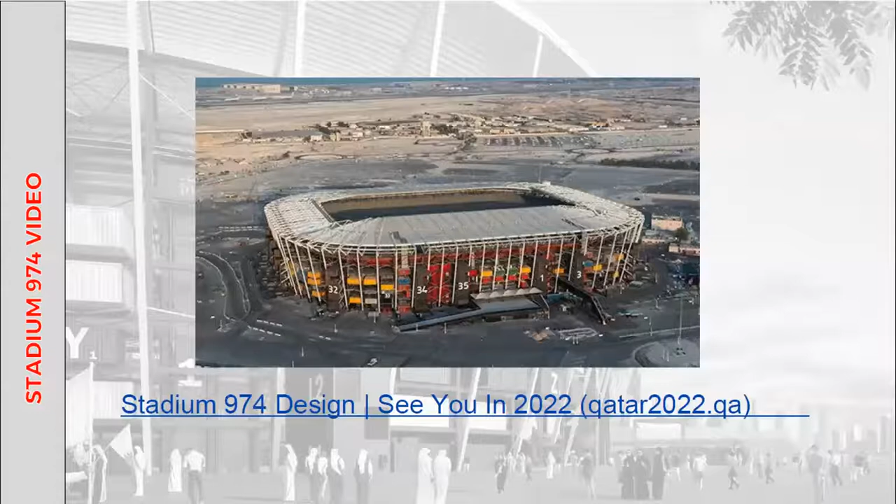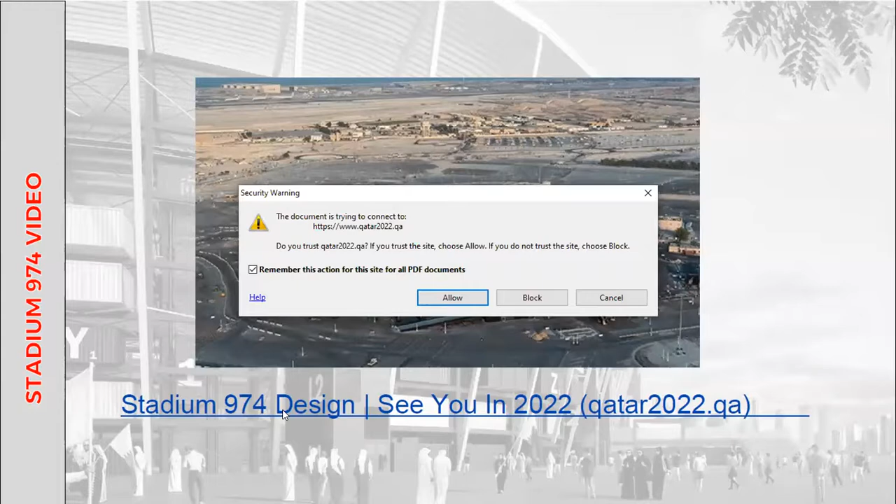And if you just want to click on that link, I just wanted to show everyone the promotional video for the stadium. It's just a YouTube video. This is basically how the Supreme Committee, which is our client here... You just scroll down this page, Dr. Dara, and there's a YouTube video. This one? Just here. Just play that.

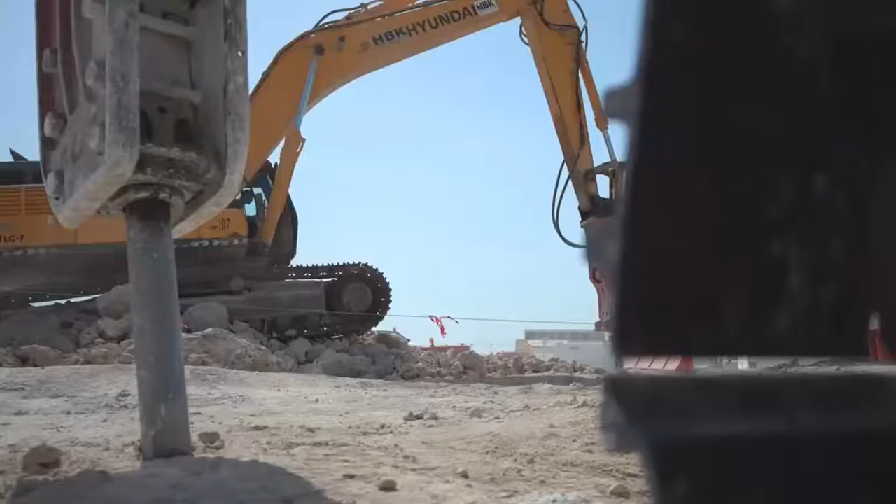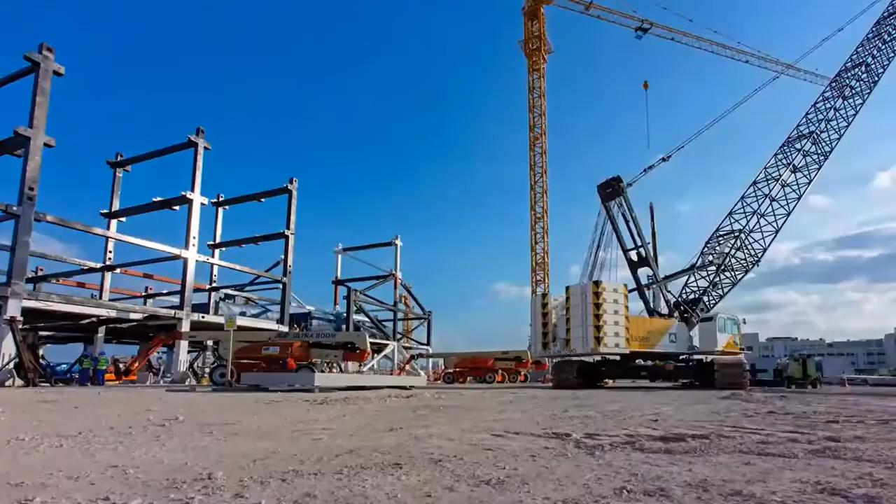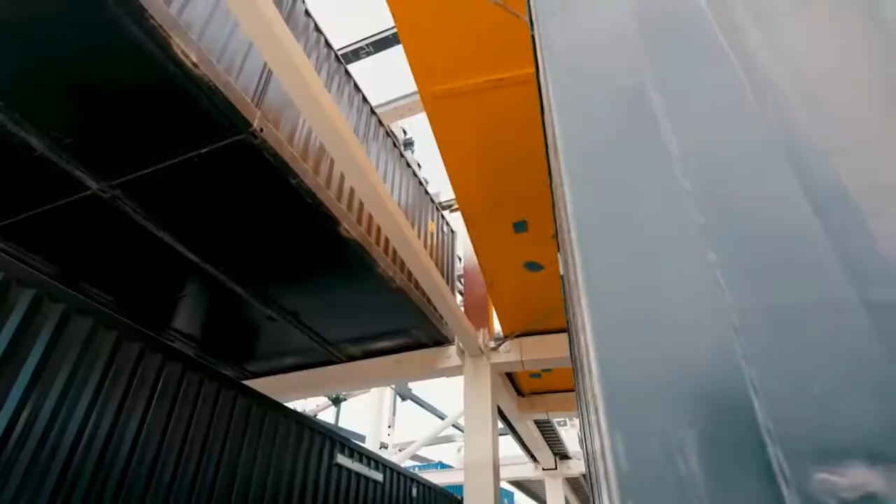So this illustrates the idea behind the stadium, selling the concept of a reusable container-built stadium, and some images of the construction over the last 2-3 years, and every element of the stadium has been constructed to be demounted and reassembled. So a few shots of the actual finished piece. That's here in Doha, and there actually have already been games played in this stadium in the last 2 or 3 months as well. So it's been tested on all the different aspects, and it's functioning as planned.

So we go back to the presentation, Dr. Dara. Yes, sir. Shall I move on to the next slide? Next slide, please.

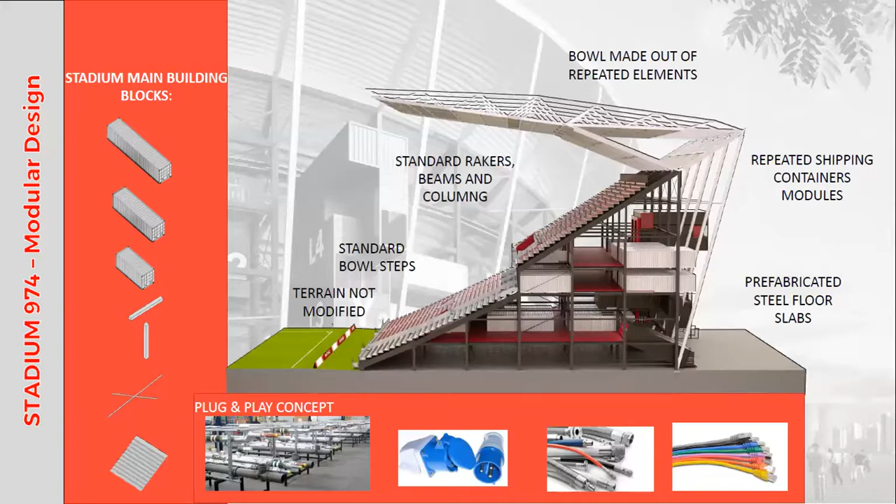So the whole concept behind this is the idea of a plug-and-play system, where the shipping container modules can actually be relocated and disconnected from the main housing and reassembled in a similar manner somewhere else. Go to the next slide, please.

So we've got a color coding system to denote the different functions in and around the stadium, so that it's clearly readable what the functions are. They've got those listed there. The idea is that with the look and feel of the stadium and the containers, they didn't want to diverge from a normal container look and feel because of the future aspect of it being repurposed and reused. So they're using readily available colors that are normally found for this kind of feature. Next slide, please.

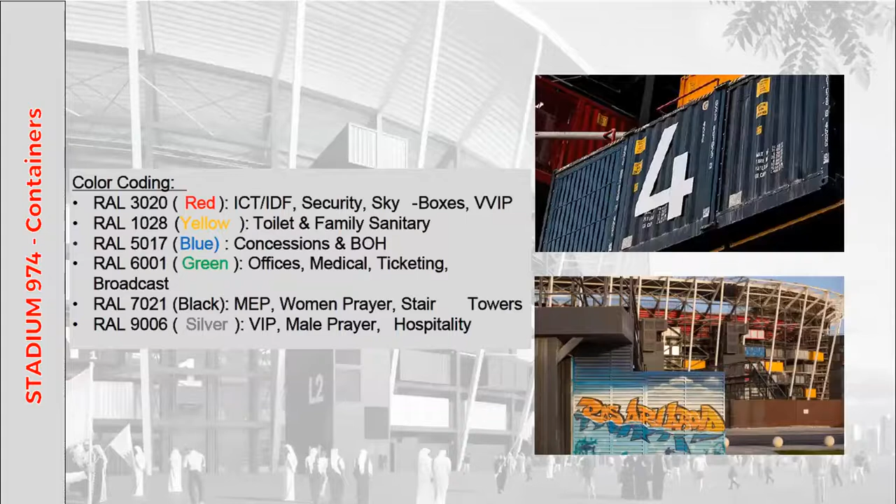So in terms of the actual construction, there's been a BIM 360 model in use. So all of the structural elements of the stadium, the beams, the columns, and all of the shipping containers have been asset tagged with a QR code. This code basically gives a three-dimensional position and location marker for each of the elements, which is coded back to the live model. This helps teams to ensure that the right element is in the right place in terms of the XYZ coordinates. It's also going to be used extensively when the structure is demounted and reassembled elsewhere.

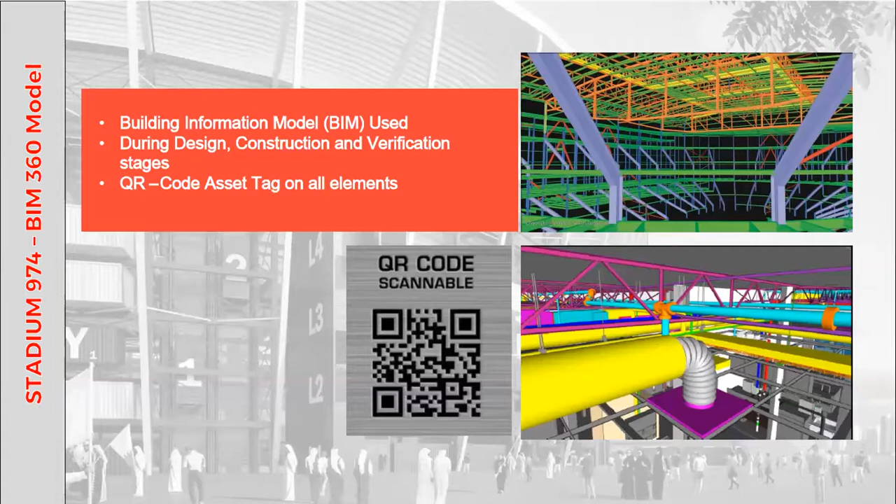And our team at WSP have been using this to verify the actual coordinates of the elements in the actual site and report if there's any deviation between what the model is saying and what the actual site measurement is saying. So it's been a really useful tool to verify and confirm that everything is going together as designed. Next slide, please.

So all the stadiums of the Qatar World Cup are being certified under a green building and sustainability system called GSAS, which stands for Global Sustainability Assessment System. So very similar to the IGBC system in India, similar to LEED and BREEAM. All of these are green building certification systems, and it's actually assessed across 52 different criteria, which are divided in the headings that you see in this graphic here in terms of urban connectivity, site, energy, water, materials.

All of these are headings which the standard is organized under, and this particular stadium is going for a sports certification, and it's actually targeting 5 stars. It was actually targeting 4 stars, but we've received confirmation that it's a 5-star rated design. So we've had to go through quite a rigorous process. It's been third-party audited by GORD, which is the authority that comes and assesses these projects. Go to the next slide.

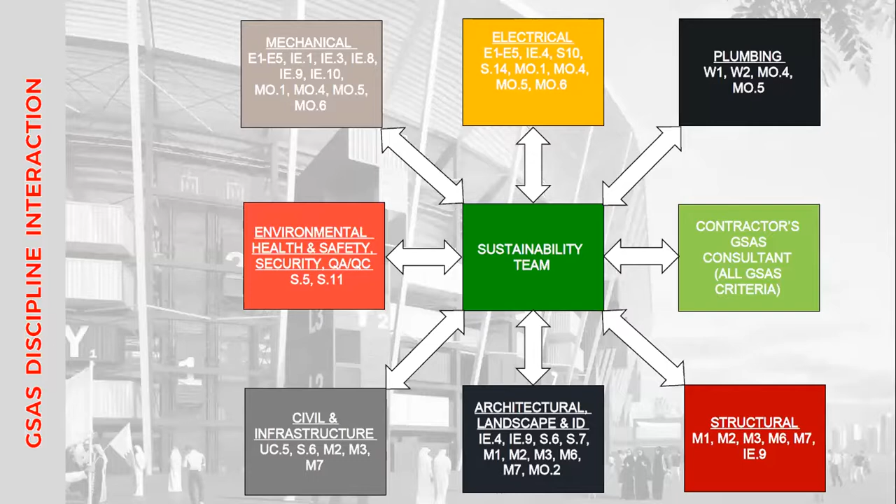So this is quite a high bar in terms of compliance, and it is often the case that materials and finishes get changed through the course of a design life cycle, and this is to make sure that the actual end product is complying with the requirements, and that what is actually being created is a verifiable green building. Next slide, please.

So one of the criteria which is relevant to CEPT students in particular is the whole aspect of responsible sourcing. How are materials produced? What is their provenance? Where do they come from? How are they procured? So the certification system drives teams towards responsibly sourced materials.

So everyone may have heard of the FSC label, which is for anything that's coming from timber products, whether it be wood paneling, veneers, even down to paper, whether it's coming from a sustainably well-managed source. When a tree is cut down, is another tree planted? This certification system is independent. They come in and independently audit a plantation to make sure that everything is done sustainably. There's also a British standard to look at this aspect in quite a lot of detail. It does set out what the requirements are.

Also for steel and rebar construction, there's a system called UK CARES, which is also looking at the whole facility. Where is the actual ore and the material for the metal coming from? Is this mined in a sustainable way, in terms of the labor practices and all these other things? So there are independent certifications that design teams can look to ensure that they've got a very responsibly sourced product. And this is one of the ways that the GSAS system drives this aspect in its certification. Can you go to the next slide, please?

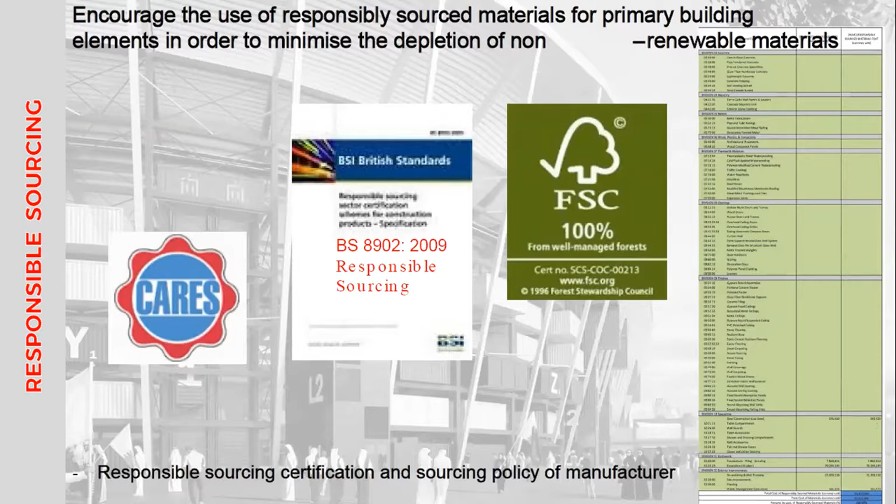So one of the easy to understand aspects is to do with recycled content and recycled materials. So when we talk about recycled content, we're wanting to know if the actual material contains recycled content. We're not wanting to know that the material can be recycled in the future. And this is a tactic that many suppliers use. They basically put a recyclable symbol on the product, and everyone assumes that it's green in some way. But we're asking very specific questions.

So on the right, you probably can't see because it's a bit blurred, but there's the spreadsheet that we have to fill in to notify the certification authority how much recycled content material is included in the design. And the way this is done, it's done as a percentage of the overall product, and it's given a value. So every recycled product has to be allocated a monetary value, so we can determine by the end of the project the total recycled content.

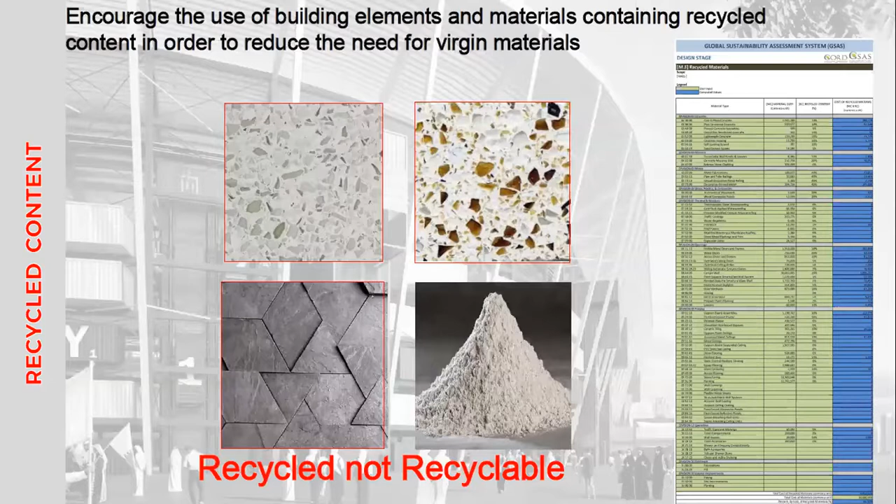And also for steel, we've got lots of products that have recycled steel in, even structural elements that contain recycled steel, and this doesn't in any way affect its structural performance or its strength. It's still a verified steel product, which just contains more waste steel that's been reintroduced into the manufacturing process. Go to the next slide, please. Yeah.

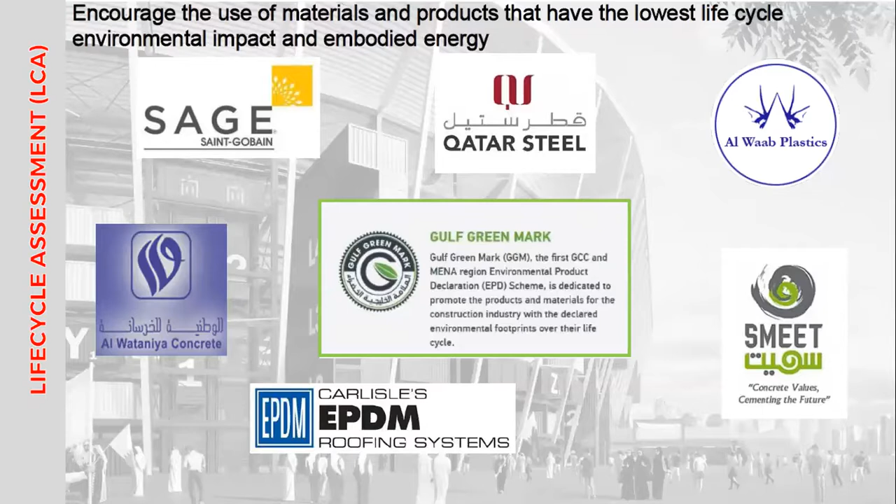So life cycle assessment is a way of assessing the entire life cycle of a material, and the GSAS certification rewards products that have an environmental product declaration, an EPD. And this basically shows that the material and the manufacturer have gone through a very stringent process to look at their entire supply chain and production chain and how this affects many different aspects of environmental impact. So this is like the gold standard in terms of material and ecological assessment, and more products are looking to have these LCAs done to get third-party verification that their material is actually environmentally friendly. The next slide, please.

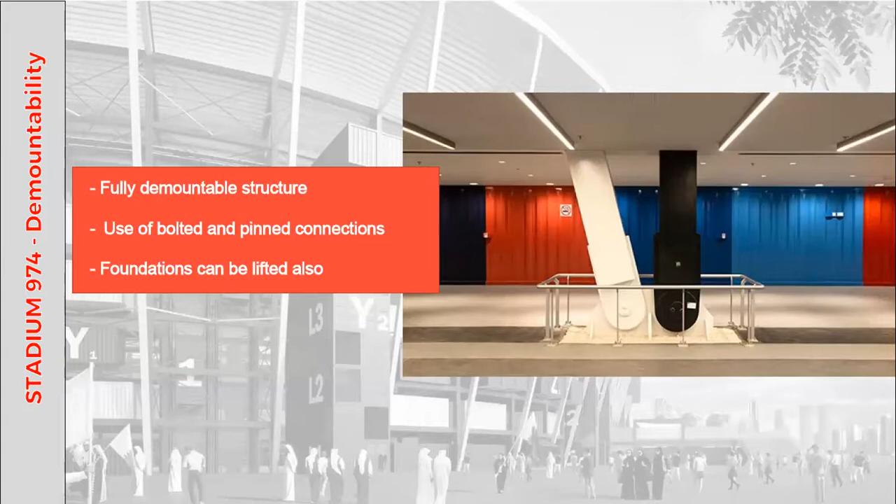So the construction details, like for example when the columns hit the ground, in this specific detail, that base plate is surrounded by just stones, which have obviously been made to look as nice as possible. But the aesthetic is a very industrial look, and it's not meant to be pristine in the way some people would imagine some of the interiors to be. Next slide, please.

So in terms of encouraging coatings that are low in VOC, so VOC is a volatile organic compound, and you find this chemical in paints and varnishes and sealants and adhesives, and especially in protective coatings for steel and for concrete. So what the certification system tries to encourage is to have low emitting or even VOC free chemicals, because they do actually affect the internal air quality of rooms, and because after being incorporated into a construction, they off gas, they release their particles into the air, which aren't very good in terms of human ventilation.

So the whole aspect of being able to create an environment that isn't full of these chemicals is what's being encouraged here. And in the same way as recycled content, there is a very detailed spreadsheet that we need to fill in, and during the process of choosing materials and products, we need to look and ask the right questions of the manufacturers, and ensure that they can actually prove that what they're saying is

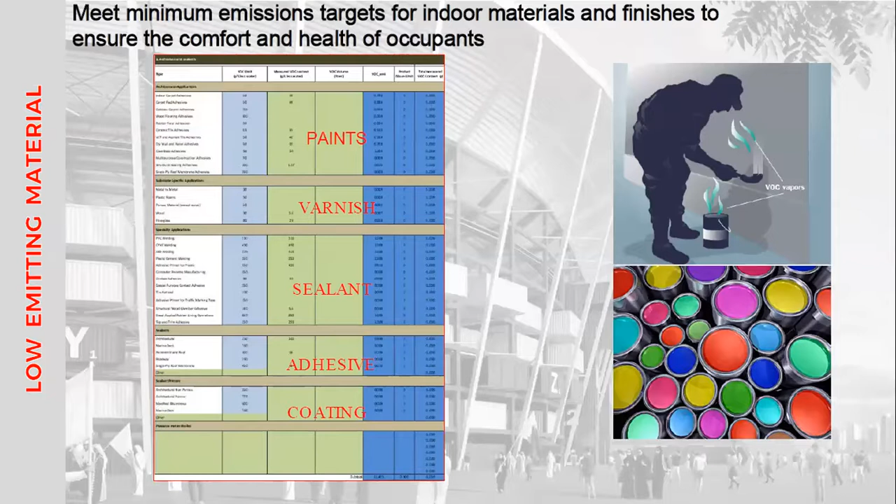Okay, next slide, please.

We are not of the view that every material is going to help every single aspect of the design. We are aware that some materials will be useful in terms of certain criteria, but unless you ask the question, you don't know. And at the end of the day, the GSAS certification is only earning points and credits once you've actually proven that the material has been used and has been incorporated.

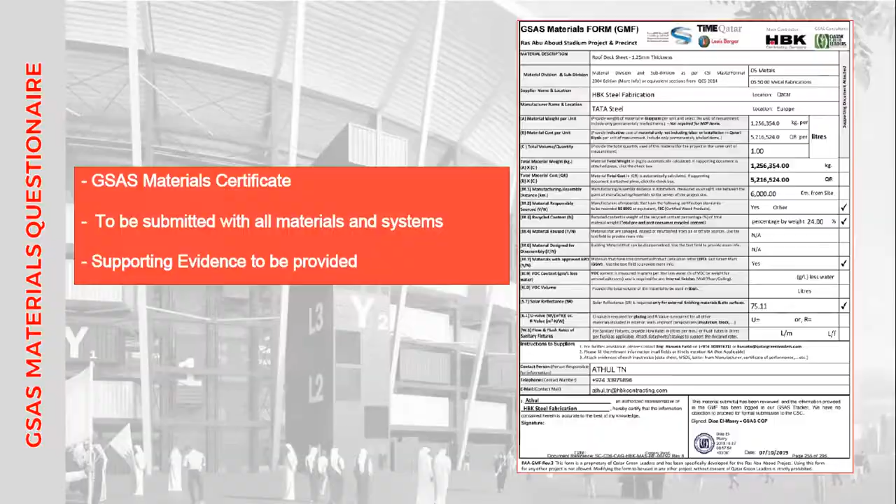So in terms of the actual numbers, we've got nearly 25% recycled content in the entire stadium by material value. So everything from the main steel structure to the containers, to the finishes, the flooring, the balustrades, everything was calculated. Some items had much more recycled content. For example, some of the steel balustrading had nearly 95% recycled content. But other aspects like the rebar used in some of the foundation had like 15%. But in terms of an overall aggregate for the entire building, we've got 25%, which is actually giving us the maximum score possible for this criteria.

In terms of the demountability, the disassembly aspect, that's measured at 63.69%. So there are some rooms in this stadium, for example, press rooms and media rooms that needed a higher room head height than a container could provide. So they were built from traditional construction, blockwork and steel, but everything else was, as I said, made from containers and from steel structure. So there's a very high disassembly percentage, and it's being used as a case study by the certification authority on how to do this in a best practice way.

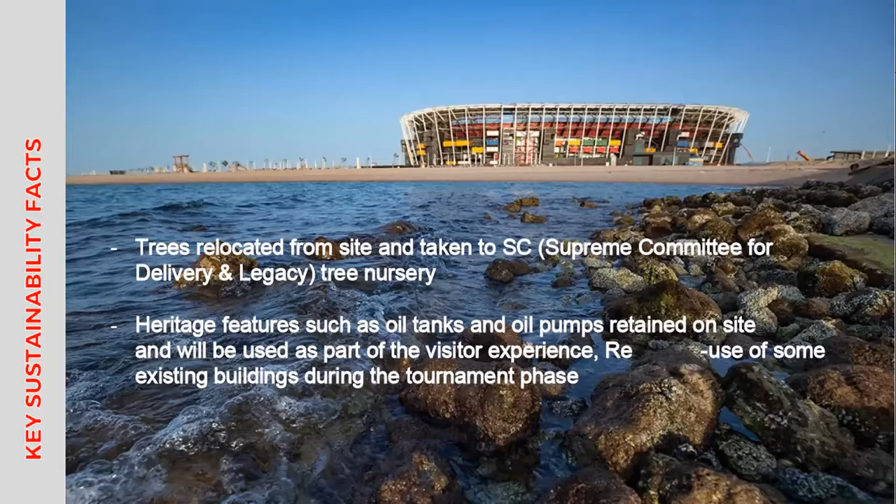I think the last slide is the last slide. So yeah, any questions? Anything that this has thrown up in terms of queries from the audience? I'll be happy to answer. Yes, sir. So any questions? Anyone?

Oh, hi. Thank you very much, Mr. Shashi Narayan. I'm just curious about certain things. How was this decision made of using these containers to make a stadium? In that process, you're uprooting the trees, and then what will happen when you demount the whole stadium? And what about the plantation?